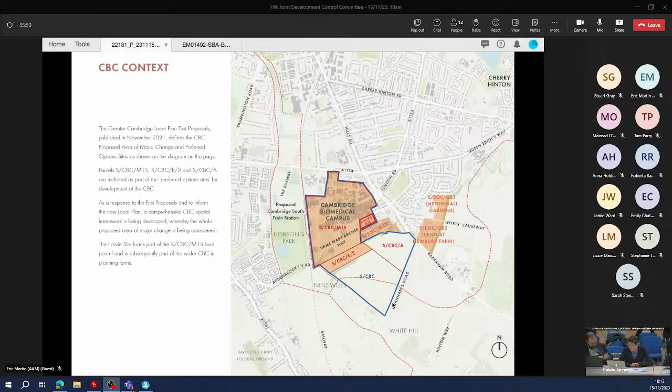So I think the screen is working, so I'm going to go through a few things. First of all, providing a bit of context to where the Forvie site is. The Forvie is located within the Cambridge Biomedical Campus, as some of you may know, and the CBC has recently been proposed as an area of major change as part of the local plan first proposals. What you're seeing here in the map is, in orange, the sites that have been allocated already, and in the blue line are the sites being considered for allocation, particularly expansion of the biomedical campus to the south.

Not part of this briefing, but important to mention that we also, as master planners, are working on the emerging CBC framework, being informed with officers, and backed by evidence-based scenarios that hopefully is going to go to members at some point in the new year.

What we've been looking at is how the structure of the place is going to work: street hierarchy, open spaces, biodiversity net gain, blue and green infrastructure, and essentially how this becomes a new neighborhood of the city, including green belt enhancements. The important part of this master plan or framework we've been looking at is creating a series of open public spaces located within a 5-minute walk from each other, and this is the structure of the place.

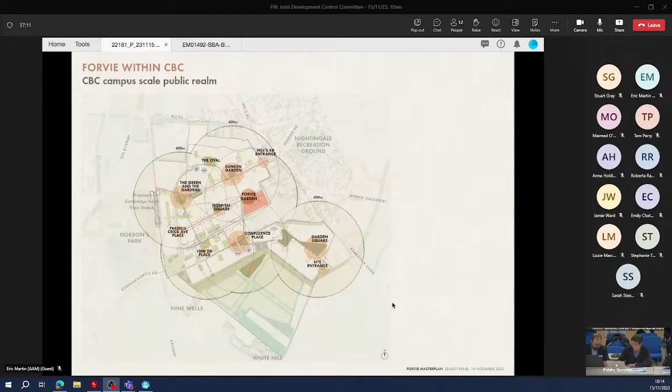These are areas where amenities are going to be located, where blue and green infrastructure is consolidated with amenity spaces and transport hubs, etc. One of these places is within the Forvie sites, and we've been calling it the Forvie Garden. We're going to discuss in more detail as we go through the presentation what this means.

This is the site itself, the Forvie sites. It's a site that sits in a transition between different scales and different characters of the place, from residential to the south and the east, to more large buildings that are part of the hospital, Addenbrooke's Hospital, to the north and northwest. We can see on the left-hand side the Children's Hospital site, which has been consented and is going to start on site imminently. There are 4 existing buildings on the site.

The existing Mickle building is on the lower left-hand side, there where my cursor is, and there are 3 other buildings on the site at the moment with different degrees of occupation from university users. They range from the 60s or late 70s to the early 2000s, in different degrees of need of replacement. It is a very car-focused area, with access to the site from the north. There are about 180 spaces in the site at the moment, and the idea is to transform this gradually into a place that is more people-focused.

As you can see, one of the main characteristics of the site is the existence of mature trees, mainly around the border, and that's something we're taking into consideration. From the university's point of view, the idea is to create a new world-class research center focused on neurosciences and mental health.

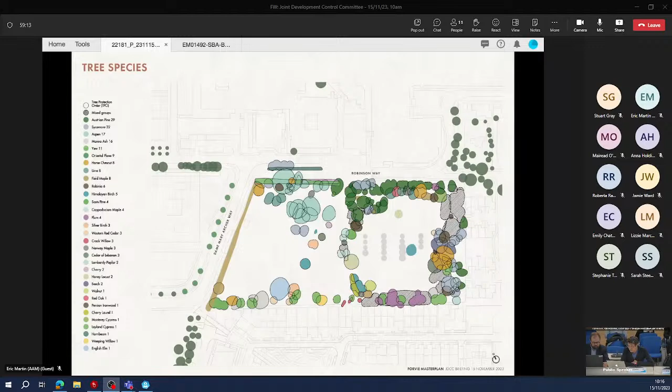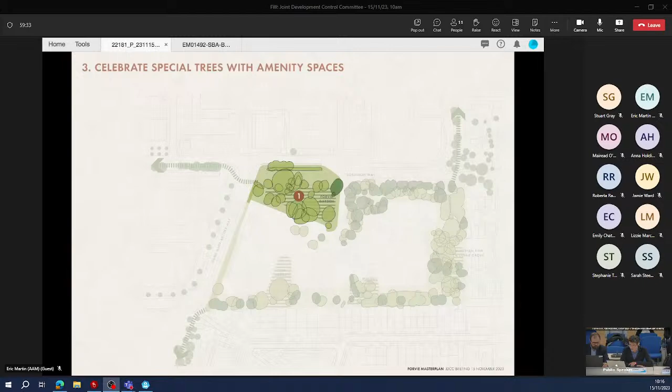As I mentioned before, trees are very important on the site, so we've been surveying, understanding, and cataloging these trees to understand their value, not only individually, but as a group. This has informed the proposal from the start, so we've created a landscape-led approach to the master plan, where we celebrate special characteristics of these groups of trees or individual trees in order to create a concept and approach to the landscape.

One of the key areas is what we call the Forvie garden, which sits at the northwest of the site, and this is where the new station opens, where people are going to come from. So it's a very important place on the site, and this is how it could be. This is an illustrative image showing the transformation of that site. At the moment, it is a car park.

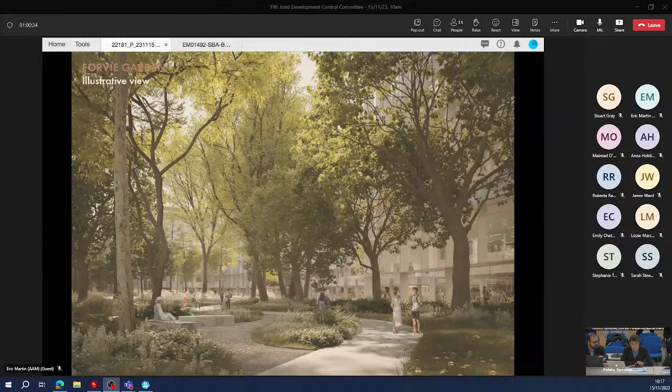So the idea is to introduce pedestrian access, cycle access, and work with new planting, and retain most of the existing trees on site with the buildings in the background. The buildings are going to be replacing the old buildings, and this is going to happen gradually over a period of time, with the Mickle 2 building happening as a first phase, nestled among trees and with paths leading to the different blocks.

The idea is that this is a scenario where the master plan is complete, so it's 3 blocks. Mickle 2 is in the middle, so it's the B1 block that you see right in the middle, and there's another 2 blocks, one in the west and one in the east. This is the roof plan and this is the ground floor plan.

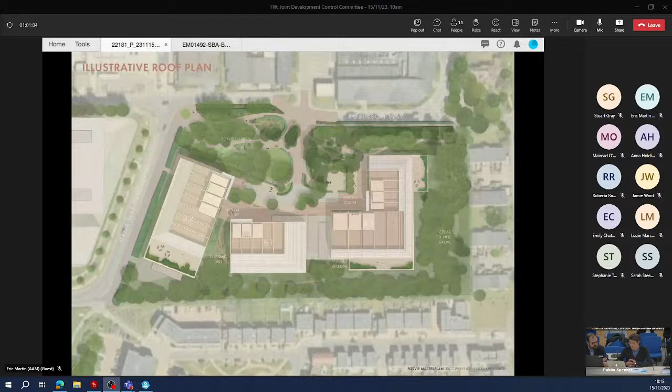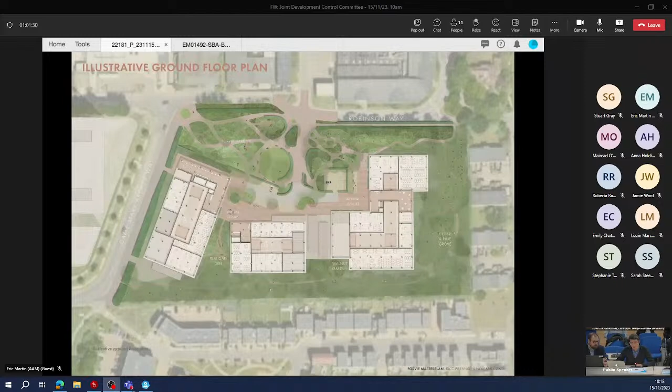These are indicative layouts. We've done a lot of work in order to establish constraints, like root protection areas, etc., where the blocks and the areas of development could be. There's a lot of information on the back of this, but you can see that the idea is that the north is very permeable with new pathways for people and cycling, and the south and southeast remains much more green, forming a green edge.

We're starting to establish an architectural language for what the blocks could be as a design code along 5 principles, from animation of the ground floor to legible entrances, facade hierarchy that responds to different orientation and location of blocks, etc. Shared amenity spaces both on ground floor and in different places in the building, and very importantly, a roof form that is sculpted and shaped.

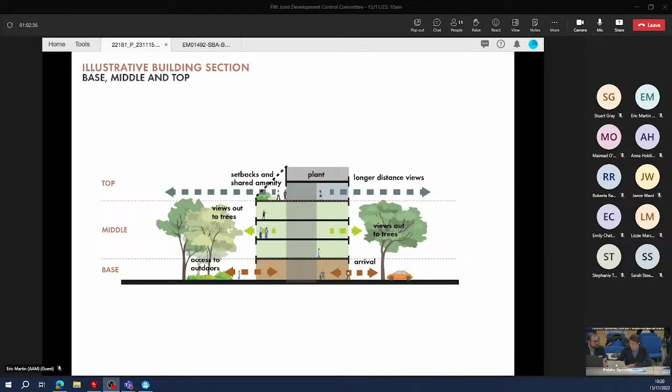The idea is that what is above the tree canopy then has setbacks and gets sculpted in a way that it's interesting, to form this idea almost that there's a science village here. So anything that skylines above the tree line then becomes an interesting skyline to avoid flat roofs and blocks, which are prevalent at the moment in CBC, and we're trying to change that.

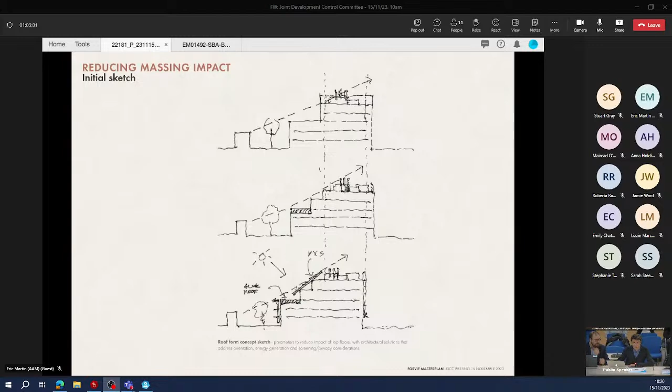This is an early concept sketch that describes how that could be achieved by stepping the top and working with plant on the top. There's a lot of kit on these buildings because they're science-based, so it's the idea of celebrating science as well, working with the roof rather than against it.

These are photos of a model that we did, a physical model that shows how the phasing could work, starting at the top right-hand side with the Mickle 2 building, and then gradually and carefully replacing buildings along a period of time as and when needed.

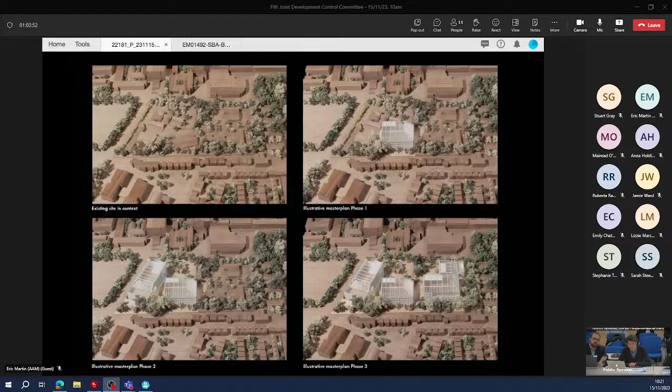And this is just photos showing a model. I'm going to hand over to Neil, who's going to be talking about the technical aspects of the master plan.

Thank you. Thank you, Eric.

So I'm going to talk quickly about the engineering and technical aspects. So, Ramboll, I'm presenting here. We're covering the discipline shown on screen.

Could you just bring your microphone a little bit closer? Is that better? Please take your time.

Yeah, okay, don't rush. So I'm aware I've got a lot to get through here in quite a short period of time. I'm covering lots of disciplines here and lots of detail over the last 12 months that we're going to talk through.

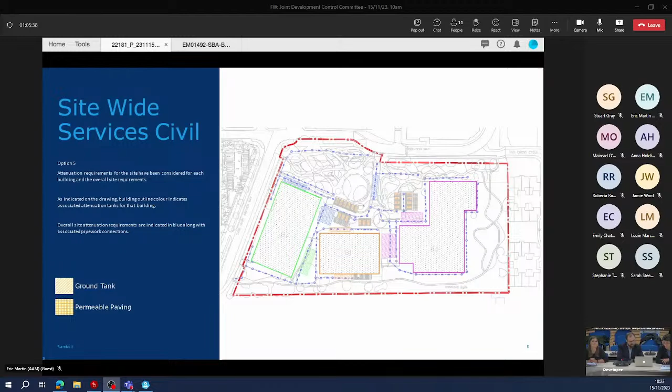We are looking across disciplines. The site is relatively constrained because we're trying to do the right thing around the trees and the greenery, protecting the tree protection zones and root zones. So we have to think quite early on about how all of these services stack up and how they integrate and coordinate with each other.

So you can see here the various colours of shading. As I say, I'll talk about the civil scheme in a minute, but this is just to give you an idea of the level of thinking we're at. A lot of thought and time has gone into the coordination, reinforcement, and phasing of the utilities to serve these buildings as they come online.

Sorry, I'm not interrupting you. Sorry, I am interrupting you, but I just want to say there's going to be a fire alarm in a few minutes' time. It is a test, not an actual one. So we'll pause when that happens and then carry on. Just to warn you.

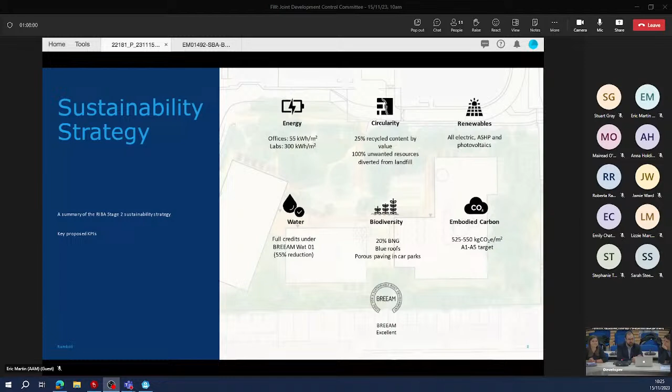So to talk about BREEAM, currently targeted score is 77.45%, so a BREEAM rating of excellent, with a potential to achieve 88, and we'll obviously target all of the water credits in there.

This is an early BREEAM assessment, done at master plan level, not a building by building level. As the design of the scheme progresses, the BREEAM assessors will become more targeted on a building by building basis. But for now, it's about setting the design parameters and understanding what the outputs are and the targets we're trying to hit.

So, I promised you a civil engineering section.

The site runoff and surface water treatment of the site is probably one of the most technically challenging aspects that we're dealing with. We've got very, very low runoff of 2 litres per second per hectare, and in order to achieve that, we have to put lots of attenuation on the site. So we have a combination of blue roofs on the buildings, essentially a zone on a roof that can hold onto water and release it more slowly into the drainage system, rather than the traditional way where it just all pours down the drain and off it goes. So the strategy is all about capturing the water and slowing it up as much as possible so that we don't overwhelm the local network.

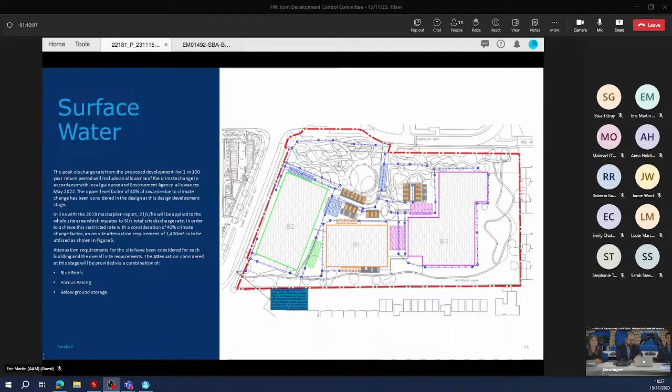So to talk quickly about mechanical services, there's quite a lot of detail in here, which is really for your information as a pack. So I won't necessarily read every single thing that's on every slide, but you can always refer back to it. So this is a master plan.

We're not actually designing the buildings themselves yet in all of the detail inside, but what we do need to do is be able to size the primary plant and understand how the plant will fit within the planning envelope, essentially within the building envelope that Eric's team have drawn, and coordinating with them with these nice chamfered roofs that lessen the visual impact of the buildings and make it look attractive.

So in order to do that, we do some preliminary calculations based on a number of assumptions for now. These are going to be, as Eric describes, laboratory buildings, and laboratory buildings have quite a high plant requirement, so the plant on laboratory buildings is an important aspect of the design, and they need to be considered early on.

So the site will be an all-electric, fossil-fuel-free site. We'll be removing natural gas for heating and replacing it with electrically powered air source heat pumps.

Good to know it works. And just to remind you, in total you have about 20 minutes, so I'm going to speed up a little bit.

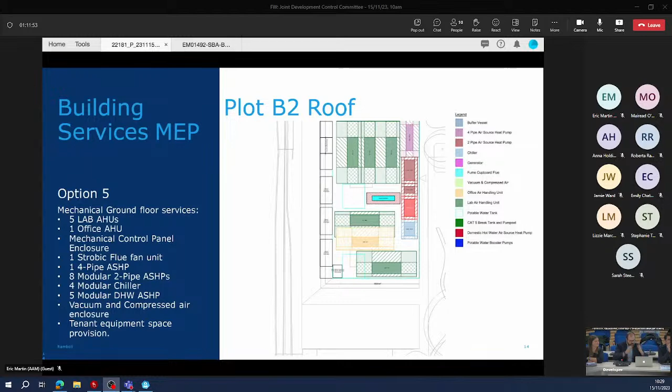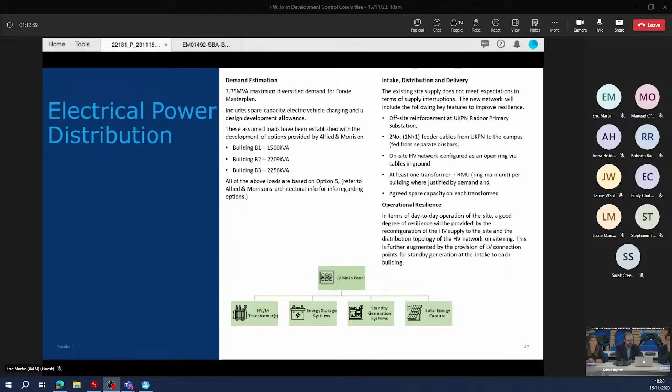So electrical - I talked about all electric buildings, so we obviously require quite a lot more power in order to power this all-electric fossil-fuel-free site, so we will be applying for additional power, approximately 7 MVA, and there will be electric vehicle charging on site with 112 spaces with a mixture of active and passive.

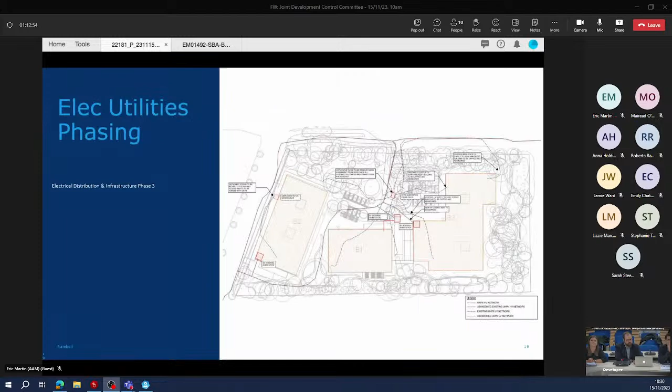And what I've got on screen here now really is just showing you the phased development of the electrical infrastructure.

Exterior lighting - we've done a very early exterior lighting design, but rest assured it'll be designed in accordance with all the current regulations and guidance to not bleed light out of our site unnecessarily, maintaining that darkness so that we don't annoy any neighbours, but enough lighting at the centre of the site to make sure that people are safe and that we've got the correct levels of lighting for everybody wandering around.

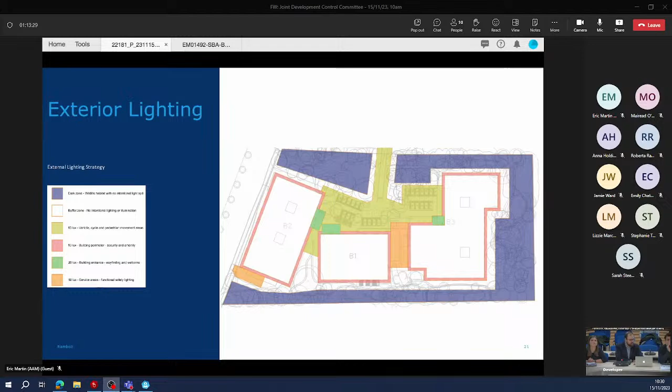Fire suppression: our initial studies have shown that we will need to extend the fire hydrant system into the site to make sure we're close enough with the hydrant to meet minimum distances. We're currently proposing dry riser systems per building, but not sprinklered at this stage.

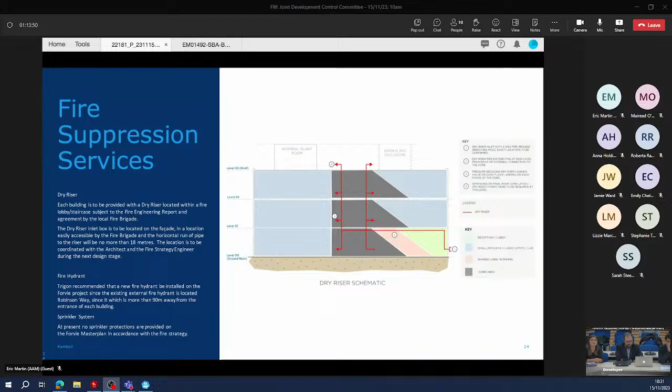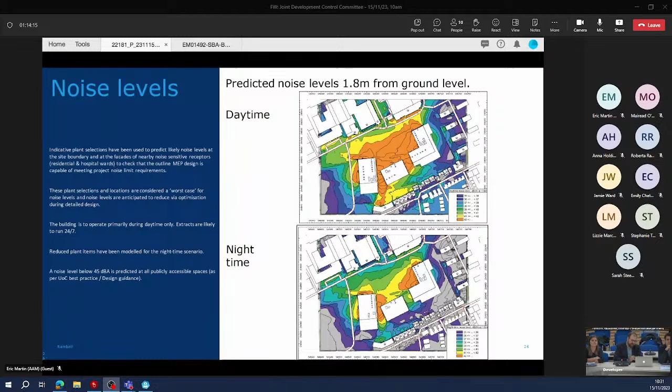Acoustics is an important part of this site. We're constrained by neighbours, with residential neighbours on our boundary, so we've done detailed modelling shown on screen - it's in your pack if you want more detail. We've modelled all the noise levels and their effect on neighbours. Green on the boundary shows we meet the City Council planning noise limits, in both day and night with the plant running.

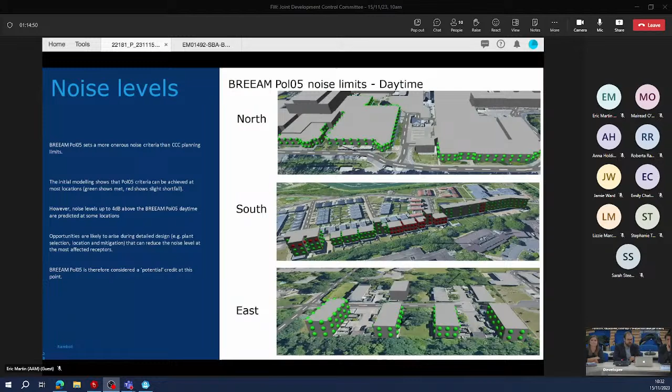We've also assessed it for BREEAM - red receptors mean we're missing the target slightly, green means we're meeting it. So we have a little work to do on BREEAM Pollution 05, which is a tougher criteria than the council limit. But because we're at such an early design stage, there's lots of design development to come, and we think we can optimise it to achieve the noise levels.

We looked at the shape and orientation of the buildings, taking typical spaces and using these to inform Eric's team on the percentage of glazed ratio they can have and the specification of the glass. We're always treading that balance between natural daylight, reducing lighting energy in the day, versus excessive solar gain in summer and having to cool the space down - calculating that balance point.

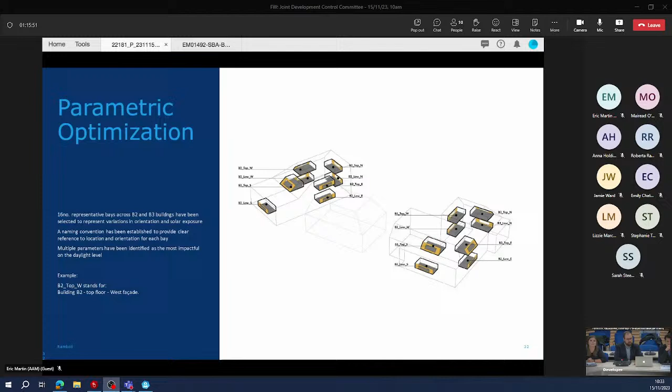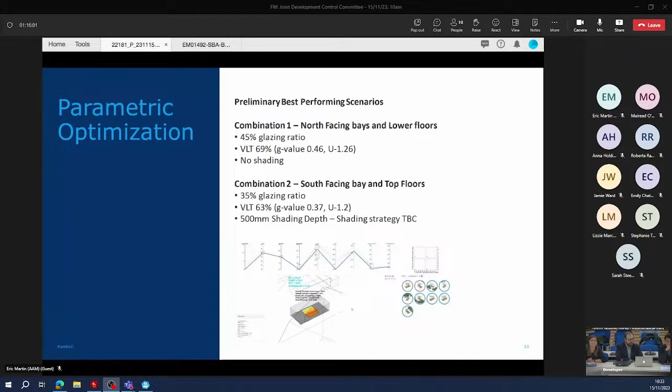Nice graphics on screen showing how we've achieved our design specification - you can see the glazing ratios for different orientations of bays.

Can I just ask how many other speakers are planning to speak? Just one. Okay, thank you. Just be mindful of the time. Yeah, shall I wrap up?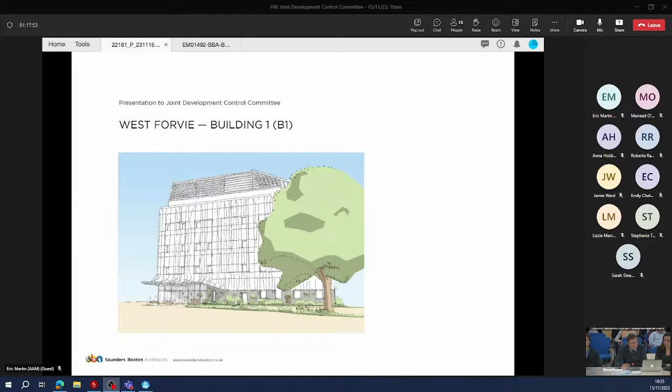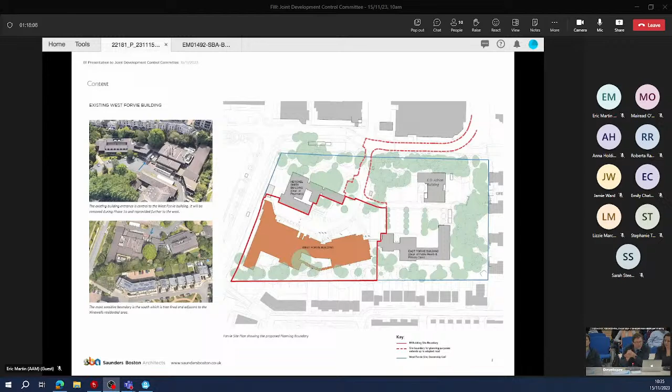These drawings show their location within the building. They are a relatively small department, but they are a really critical department at the university.

They do some very unique work, as I said earlier. They are growing and their type of work is changing, which is part of the need for this project. The other part of the need is the fact that their existing building is in a relatively poor condition. It doesn't perform very well environmentally, and it is very much at the end of its life. So there's a very pressing need to provide them with some new accommodation as part of this wider building.

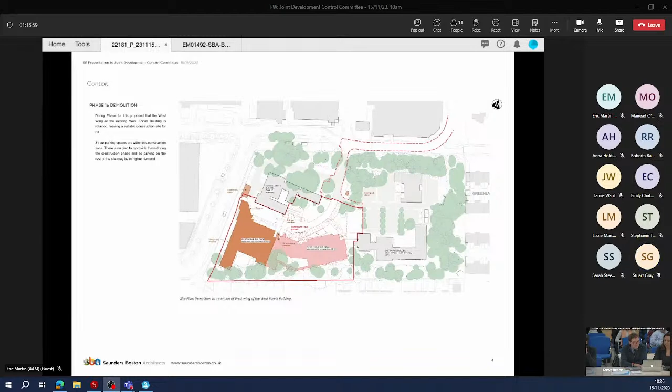We'll skip through some of this context since we looked at it a bit before with Eric. There's a lot of work we've had to do around the trees. There are some really key trees that we've worked with the officers on retaining, and that's how Eric developed some of his strategy around the landscaping and gardens we talked about earlier. A lot of what we've done is based around how we keep those key trees and actually enhance them, working around them to create better spaces than currently exist, because there are real opportunities on this site which are currently missed by a lot of the car-dominated stuff Eric talked about earlier.

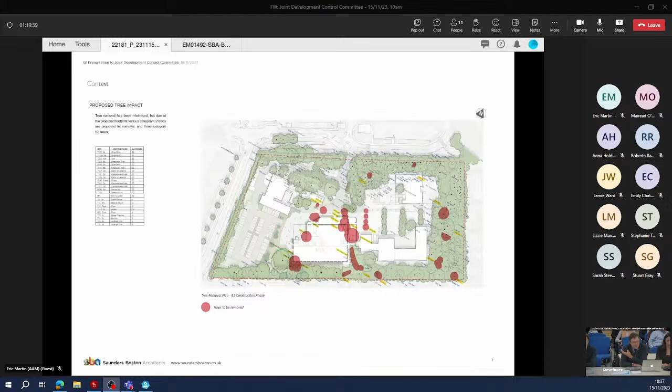So how can we use those to enhance our design and make it feel like an actual place, rather than a slightly weird 1980s bungalow land, which it kind of is at the moment.

My colleague Oni is going to talk a bit more about some of the details.

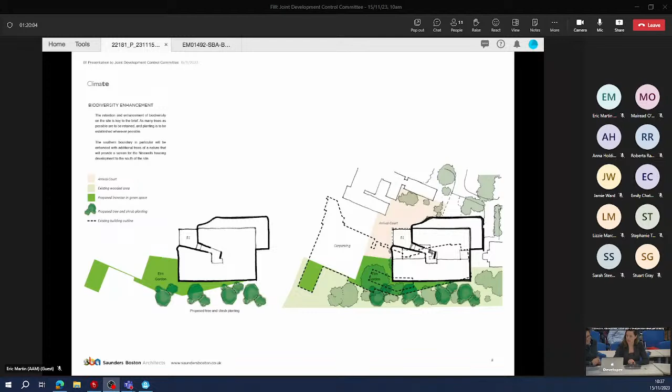We're looking to enhance the green space as much as possible. You saw some of the trees that were restricted - the elm in particular, a really large tree, is within a few metres all the way around it of the current building. So we're releasing it and opening up as much green space along the south as possible to connect into the rest of the south that's already there. That's the landscape design as it is.

The existing building will be half retained while construction takes place on the B1 building, and then the rest of the building is demolished to make way for replacement car parking for what's already on the site, plus a few more spaces - about 20 - to cater for the new occupancy numbers.

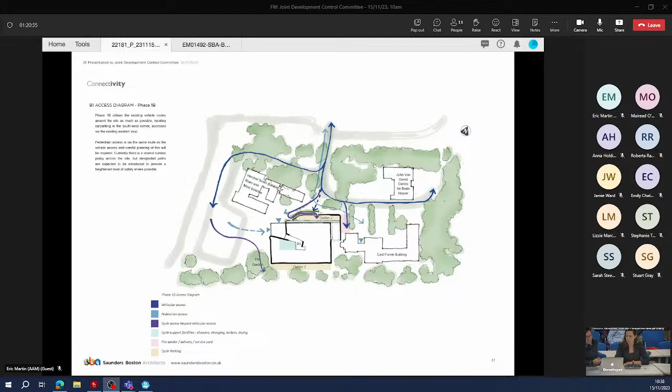This is a diagram of the access. So you've got keeping the vehicular access to the north, and then showing how you access the new building. This is how, when the master plan is in place, if designed as currently proposed, all of the pedestrian routes would be from the north, and cycling as well, minimising vehicle access to the site. There are options for cycle parking either to the south in the wooded area or to the north on top of the service - there's a service wrap that goes around the building, which will be explained later. So that's the preference, but we're just seeing if that's really feasible.

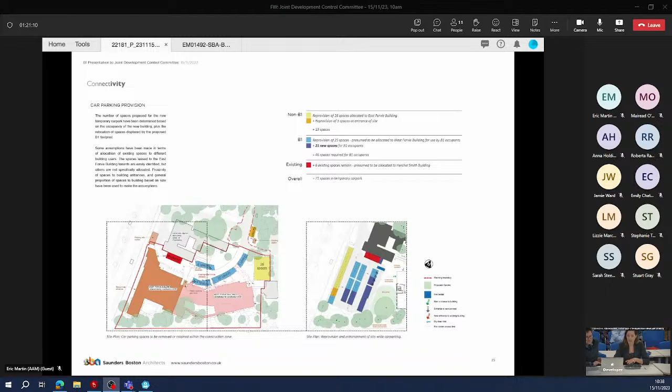Car parking is here - this diagram shows how most of the spaces are replacement spaces, and there are only 20 new spaces coming onto the site.

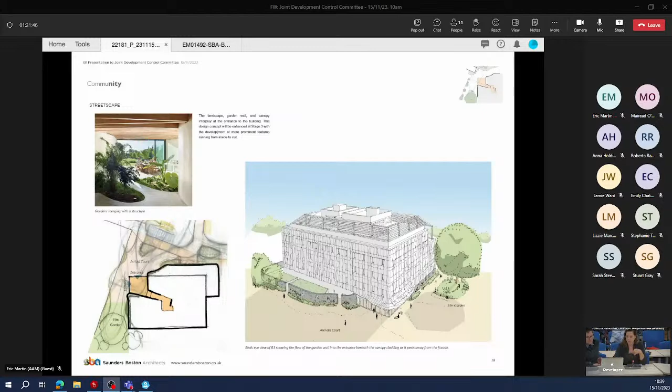The arrivals court is key for the design, both for the first building, B1 itself, and also for the master plan. So the arrivals court is highlighted for the development of the building and how it's designed. This shows how the focus of the building is onto that corner - sorry, the northeast corner, northwest corner - bringing out the canopy to open up onto the entrance, and looking for the flow of people and the visual flow to be right across that space, filling it with places for people to stop and collaborate or have their lunch, that type of thing.

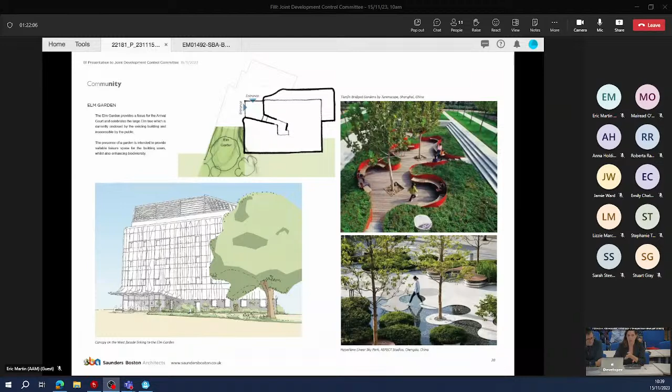Seating and planting - the elm garden, the elm tree, is going to be focused on, and at the moment it's not publicly accessible. The design would mean you could go and sit there, and the design of the garden around that is key to increasing biodiversity. At the moment that's completely built across, all of this land is built on. It's continuing the woodland on the south that already runs along most of the south, but not behind the current building, so they would increase that and again make it accessible for people.

The entrance space of B1 has been designed to be a collaboration space. It would be publicly available at the moment, so we're looking at designing it in a way that people would work there, eat there, talk, and cross-pollinate ideas.

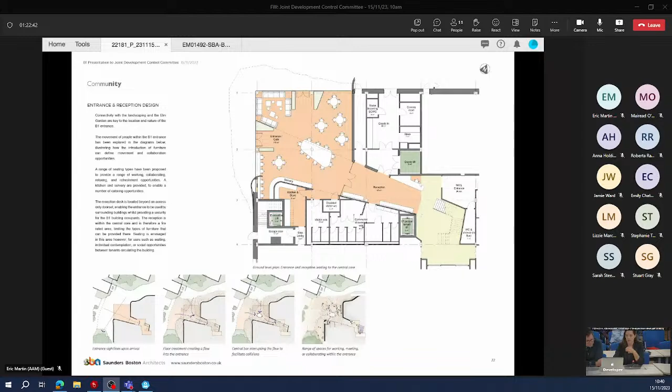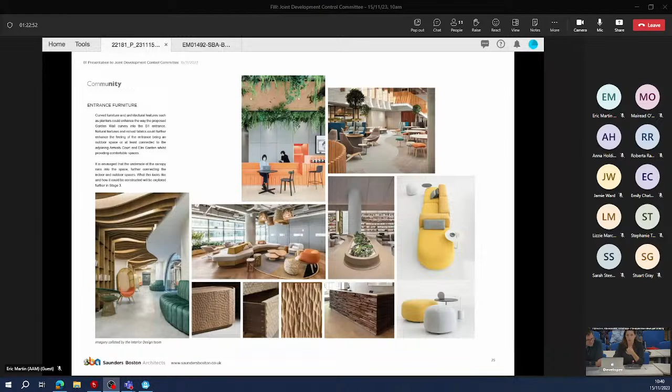That's a visualisation of the space and the type of furniture we would want to bring in, using natural materials as much as possible, with textures to make it feel very warm.

Moving into the building, there's a central staircase which is the key vertical circulation, with a light well at the top to bring light into that space. It's a space for people to stop, and the building is designed for up to 12 different companies or research groups.

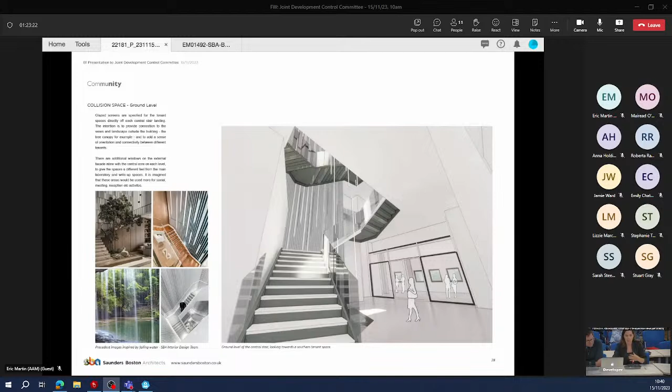The idea of these spaces is to allow people to meet and coordinate ideas, a collision space we're calling it. There's also a spine running north to south, opening up the building visually with as much glazing as possible.

These spaces could be tenanted, perhaps as shared tenant spaces with meeting rooms, seminar rooms, and tenancy entrances. Otherwise the building is left as flexible as possible, so tenancies can be larger or smaller - someone could rent a quarter, half, or full floor depending on their needs. We're looking at roughly 60% laboratory, 40% office space, with full flexibility on that.

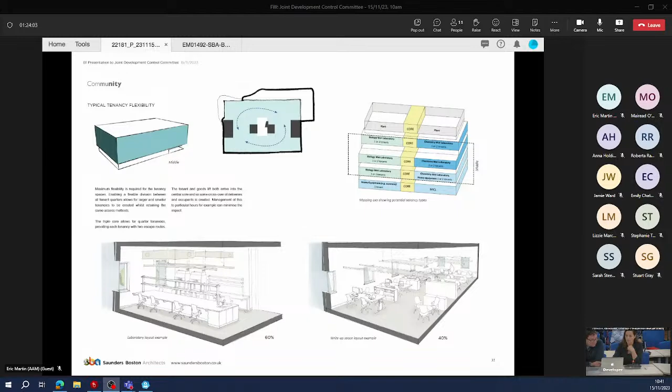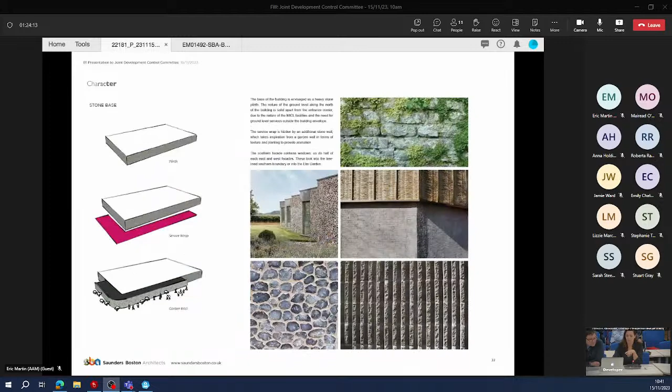The character of the building we've explored here includes a stone base, a plinth on the ground floor. This is where MRCL and similar facilities have theirs, since they need high levels of shielding and protection - very thick walls and not many windows. At the entrance, we're looking to bring that solid stonework through, giving that same feeling to the ground.

Above that, the middle section relates to the tree line, taking cues from the tree canopy base and top, so we're looking to have a completely different architectural language at that level.

We're also setting the building back, as discussed before, from the housing to the south, to make sure there's no overlooking into their gardens and no acoustic interference for them.

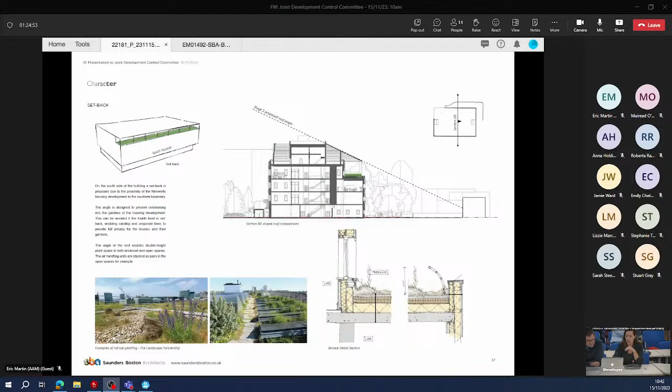The cladding on that wrap is looking to be angular and playful. The idea is also to give as much shading to the windows on the south as possible, using the angles to increase daylighting while controlling solar gain, coming in and out as appropriate.

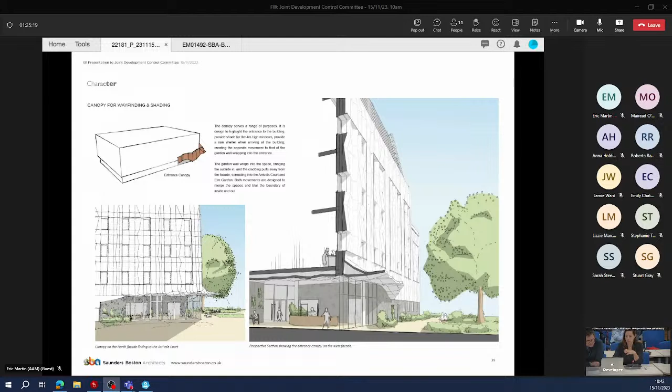The canopy is looking to extend the facade out to create a sunshade for the large amount of glazing on that corner, and also a rain canopy for when entering the building. This is a concept design, looking more at how it could work technically.

Up on the top, there's a large amount of plant to service what's a very heavy laboratory building - there are actually two levels of plant up there. The acoustic baffling is angled to minimise the visual impact of that space.

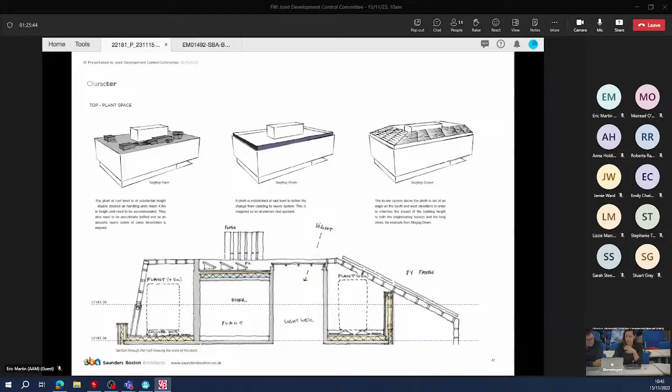Here's an impression of another building designed by Eliza Morrison, with views from the Magog Down. This is a representation of the whole building together.

For construction, we're looking to enhance thermal performance as much as possible, making it as efficient as possible. This is how the shading would work, and there will be further studies to maximise daylighting while minimising overheating.

Then there are all the different sustainability strategies being included, with a lot of water management as already mentioned - blue roofs, green roofs. PV panels along the south benefit from extremely good exposure, so we're looking to maximise the amount of energy generated on site.

That's everything - that's the final slide.

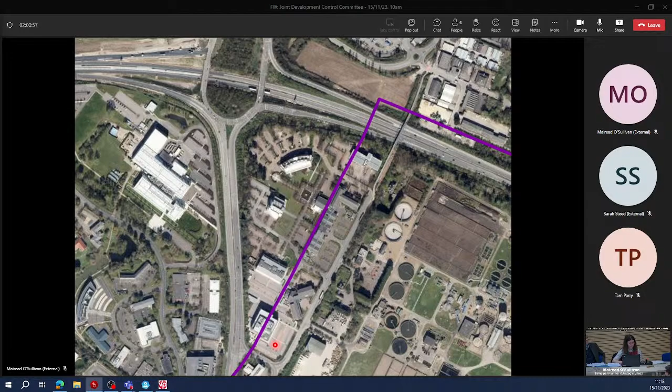So the site lies within current strategic policies within the existing local plans. We've got the South Cambridgeshire local plan covers the area around the train station, and the rest of the allocation is within the City Council area and is covered by Policy 15, the Cambridge Northern Fringe East and New Railway Station area of major change. And this is the sort of precursor to the area action plan.

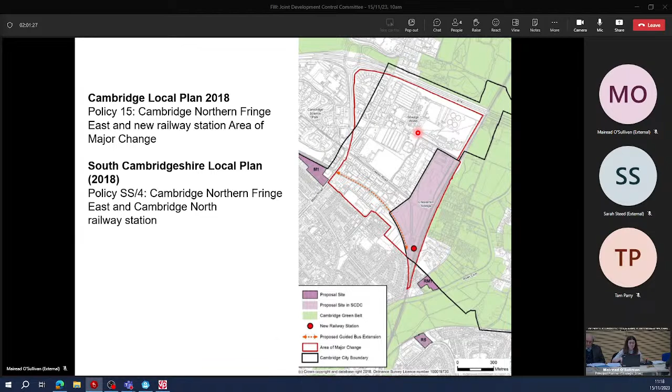And then just to touch upon it, the site lies within the area that is covered by the proposed North East Cambridge Area Action Plan. As I outline in my report, the AAP currently has limited or little weight, but the development is not considered to prejudice the wider development of the AAP, although, as I will come to, there is a discrepancy in terms of the heights proposed going beyond what is set out in the Area Action Plan.

So I believe you had a look at this slide in the last committee as well, but I thought it helpful just to touch on the different applications at different stages that are coming forward in the area. So all of the orange plots are pre-app at the moment, the core site being the kind of biggest one and closest to the site.

The red sections are current live planning applications. We've got the Brookgate site, which has been appealed, the Merlin Place site, which was at JDCC last month, and the Vitrum building site here. And then, as I've mentioned, the blue site here being the St John's site with the Dirac building, which has planning permission.

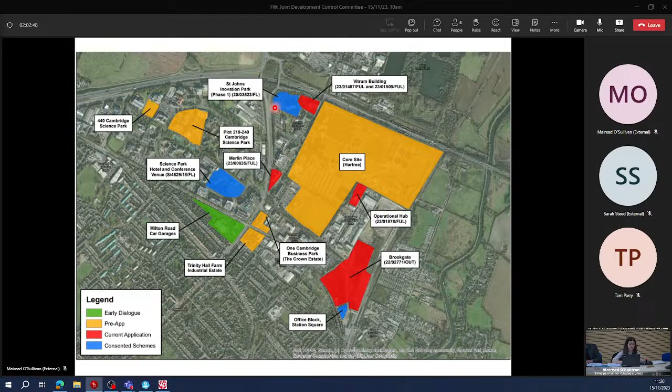The application was subject to a pre-application developer briefing to JDCC in January of this year, as well as Cambridgeshire Quality Panel and Disability Consultative Panel. I'm not going to go through every element that responded to that in this slide, as that would be very textual, but it's covered within section 10 of my report, and I'll try to weave it through my presentation where members expressed an interest and changes that have happened as a result.

Since the application has been submitted, there have been amendments to the scheme. There were originally objections from the urban design and landscape officers, and additional setbacks have been included on level 4 to try and overcome this objection, which have removed those objections. There's also a small extension in this lesser sensitive part of the building to make up for some of the floor space lost. As I've mentioned before, cycle parking has been relocated from the basement to the ground floor.

So I have a site plan here to illustrate the form of the building. It's two interlocking block forms. In terms of landscape features, we have a public square adjacent to Cowley Road and the Jane Coston Bridge. There's also a colonnade at ground floor, a covered area, part of the layering of the building design, which we'll see when we come to that element.

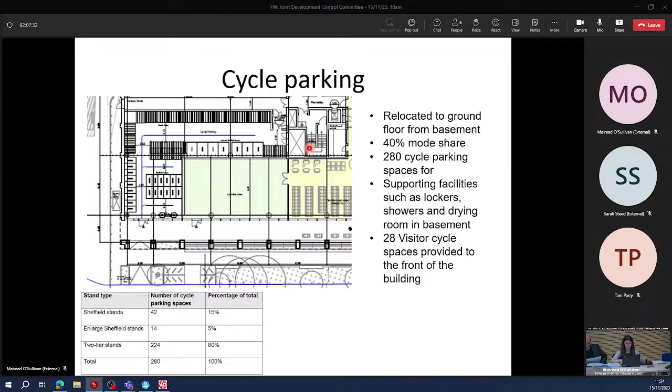Moving to car parking, provided in the basement, there are 99 spaces proposed. This has been reduced since the application was submitted, from 102. There are 5% blue badge spaces provided. The overall level of car parking is compliant with the NEC transport evidence base, which requires a maximum of 29% mode share, and what's being provided here is 24% mode share. It's also a reduction from the existing 108 car parking spaces on the site as it is. In terms of potential displacement parking, there is a Section 106 contribution requested for parking restrictions in Milton, should they be required, as the site is within walking distance of Milton.

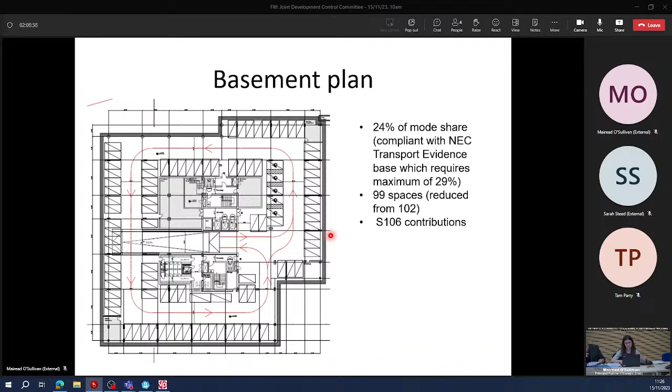Just briefly touching on the floor plans, level 4 shows the terrace areas, which would include planters. Should the Cambridge Water Recycling Centre be relocated, these could also become amenity spaces with level access, but use of these for amenity purposes won't be possible while the Water Recycling Centre is in situ. Then just to touch on the plant level, which has a green roof with plant set back from the edge of the roof. The plant would be covered by a mesh screen that would be planted with greenery.

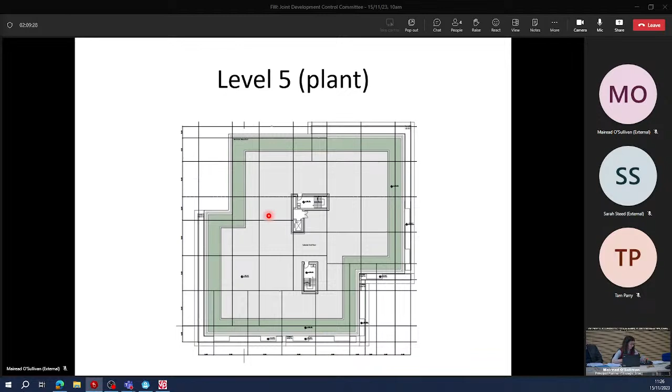I'll touch on the elevations, but move on to more CGIs and visuals from the landscape and visual impact assessment, as they're probably easier to understand. But first, just to identify some of the key features of the building.

The top elevation is the northwest, where we have the basement, car park access and servicing area. You can see the terracing and the plant level, which will be quite green, as it will have climbing plants.

The bottom elevation is to the A14. The dotted line you can see here is the line of the trees. When I come to the CGIs, we'll see the amendments to the scheme which introduce this additional element of terracing. Then we've got the southwest elevation to Cowley Road on top here.

You can see the colonnade of the building with glazing underneath, and the way the fenestration changes as it moves up the building, with larger elements of glazing lower down.

You can see the different areas of terracing we've planted, and the public square here. Similarly, the elevation towards the Jane Coston Bridge shows the public square, which has a feature tree, and the main entrance to the building here.

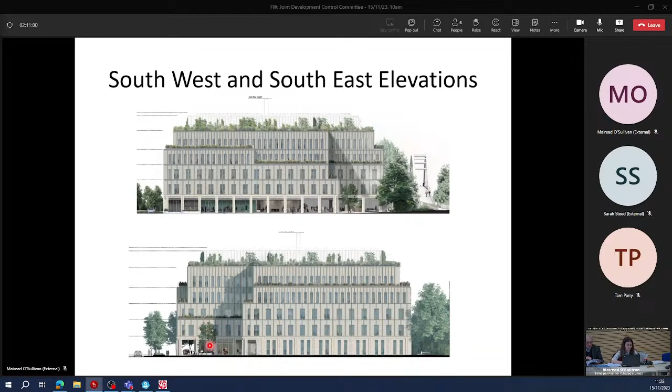In terms of the sections, we've got basement car parking and a larger floor-to-ceiling height on the ground floor. Generally, the floor-to-ceiling heights allow for flexibility should another use come forward, which I know members were interested in during the briefing. The lab and office space is divided within the building.

Lab space would be provided in the less active areas, towards the A14 and the servicing elevation, with office spaces closer to the colonnade and the public square.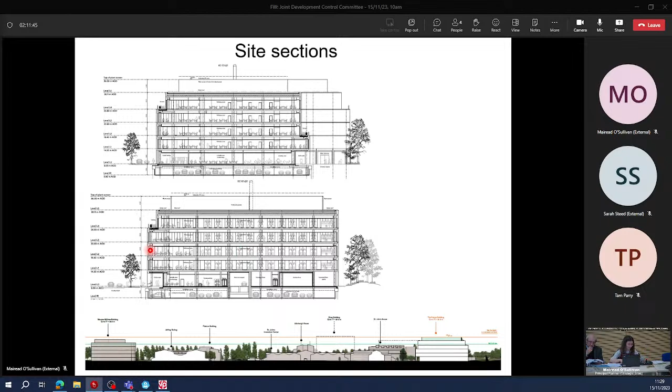If I move to the next slide, you'll see the additional area of terracing and the setback, which provides some relief, pulling the mass of the building back and adding to that layering.

Maybe if I just go back and forth once more for clarity: here we have it as submitted, and here as proposed.

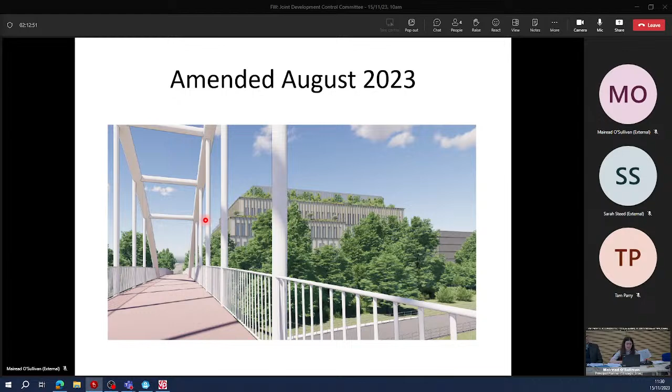Again, the Cowley Road elevation as submitted - there were concerns about the length of the facade and it appearing quite blocky. As on the last slide, there's a setback in this area, but also a further setback on the other end of the building. So those are the two areas to look at.

This is the scheme as amended, with additional setbacks here and here. This is generally considered to reduce the overall length and blockiness of the building.

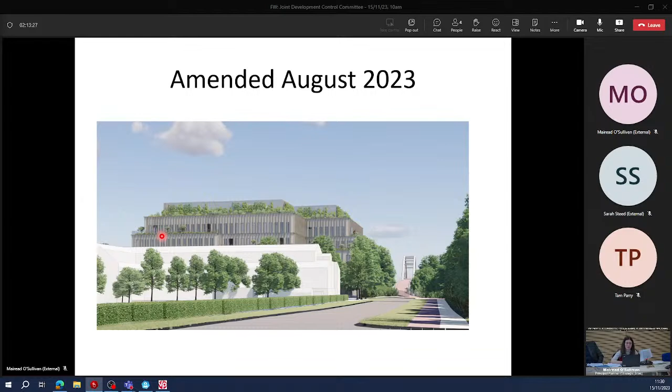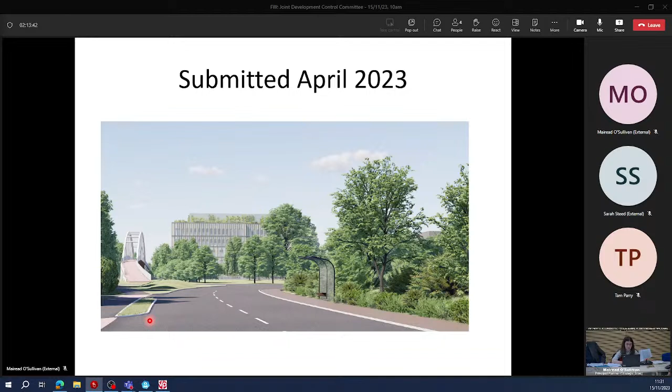Finally, moving on to the views from Milton - this is on the other side of the Jane Coston Bridge towards Tesco, looking across. This is as submitted, and as you'll recall, it's in this area that the amendments are made, shown here as submitted versus as amended.

Here we have a site section showing the height of the proposed building compared to the St John's area. As mentioned, the Maurice Wilkes building has been built out. The key site and building informing the massing is the Dirac building on the adjacent site, which has planning permission, and you can see the heights of the buildings are very comparable.

To note, the green line on this plan, which hopefully you can make out, represents the NEC AAP height level.

This is just a helpful slide to show the point around the length of the facade and how it compares to other buildings. It's quite comparable to the Dirac building, here, and the Maurice Wilkes building.

Also, just to pause and reflect on the fact that the St. John's Innovation Park is subject to a master plan. The master plan has been prepared by St. John's and doesn't hold any actual weight in our decision making, but it does tell us the intention for that site to be redeveloped, regardless of the status of the AAP.

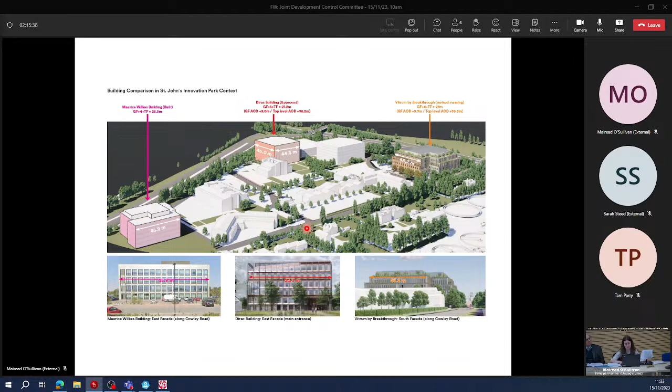Moving on to trees. The proposed building sits further back in the site and requires some tree removal in the tree buffer that runs between the site and the A14 and beyond. There are 31 trees being removed and 70 trees being planted. I should point out that all of the larger trees within the site have been retained and were seen as a constraint to development, and the trees being removed in this buffer are generally the lower quality trees.

The tree officer has raised concerns but not a formal objection to this impact in terms of the relationship with the tree buffer. The additional planting proposed in the tree buffer area is quite large semi-mature trees, which will help with the screening of the building and are shown on the visuals. The tree officer has noted some concerns about the inclusion of these larger semi-mature trees and their impact on some of the existing trees.

But a condition is recommended requiring replacement planting should any of the existing trees shown to be retained fail within 5 years. Any new trees would also be required to be replaced should they fail, via the landscape condition that's protected in that sense. Overall, the tree impact has been considered to be acceptable.

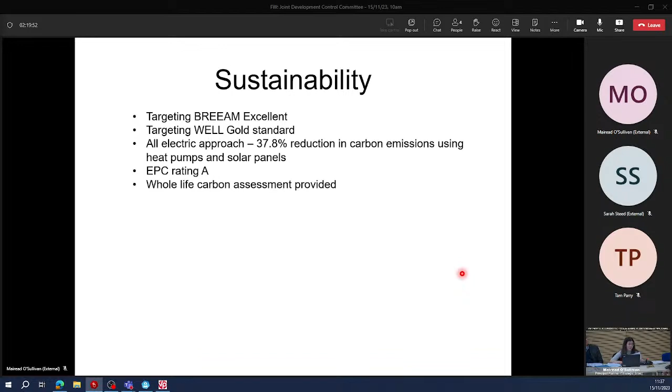Moving on to sustainability, the building is targeting BREEAM Excellent and is comfortably meeting that at the pre-assessment stage, as well as targeting the WELL Gold standard. It's taking an all-electric approach with a 37.8% reduction in carbon emissions using heat pumps and solar panels. It has an EPC rating A, and a whole life carbon assessment has been submitted with the application.

On the water conservation area, there's a water conservation strategy which we've recommended a compliance condition around, as I mentioned at the start of the presentation. The BREEAM calculations show a 74.87% improvement over the baseline condition with all 5 WAT 01 credits. In terms of water use, it's estimated that it will be very much comparable with the existing building, with estimated fresh water consumption for the use at about 9,400 litres per day.

The existing building, which is under-occupied, uses about 9,000 litres of water per day, but should it be fully occupied, it's predicted it would use 13,600 to 17,100 litres per day. In terms of how the water conservation strategy is achieved, it's a hierarchical approach to minimising water consumption, starting with point of use efficiencies, low water fittings, then system efficiencies, and then also alternative sources of water for grey water recycling, rainwater harvesting, as well as collecting water from the air conditioning units.

To touch on the adjacent site, I thought it would be helpful to include some slides showing the St. John's development, which is consented. It's these 3 buildings here.

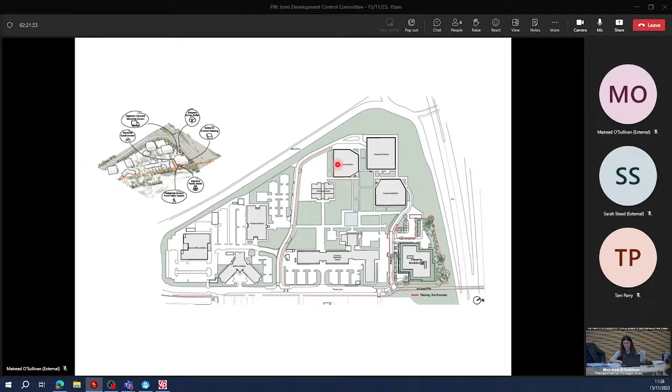Just briefly to touch on this for information, this is sort of how the adjacent site would appear when it comes forward.

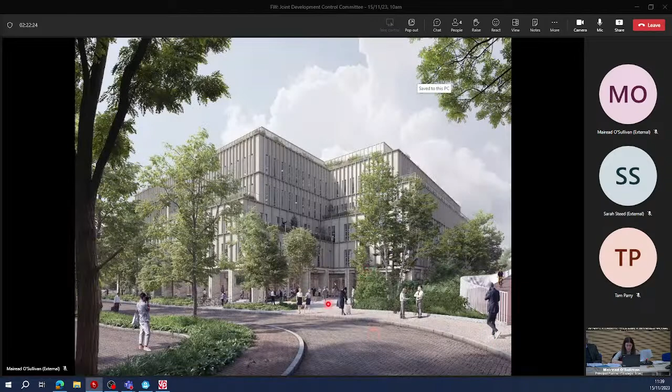Here we have a CGI of the proposed building, just to highlight some of the key design elements. We've got the public square here. This is the Jane Coston Bridge, looking from Cowley Road. Public square here with the colonnade which wraps around the building, and you've got the different areas of terracing as well.

Cyclists would come off the footpath over here and access the cycle store down here, further down the colonnade on this plan. This is just further along Cowley Road, and you can see some of the cycle parking in the public realm for visitors.

I should highlight that there is some seating shown on these plans, and as I flagged earlier, it's not possible for there to be areas of seating while the water recycling centre is in situ. But these areas and the detail could be provided at a later date through that building management plan condition.

This is the same view we saw just a moment ago, but this is from the landscape and visual impact assessment, a verified, rendered view of the proposal. In terms of architectural treatment, I don't think I've highlighted the materials: the base of the building will be brick with aluminium cladding on the upper floors.

This is the view from Cowley Road. As you'll recall, we had amendments in this area with this additional area of terracing to reduce the length, and again as well in this area here.

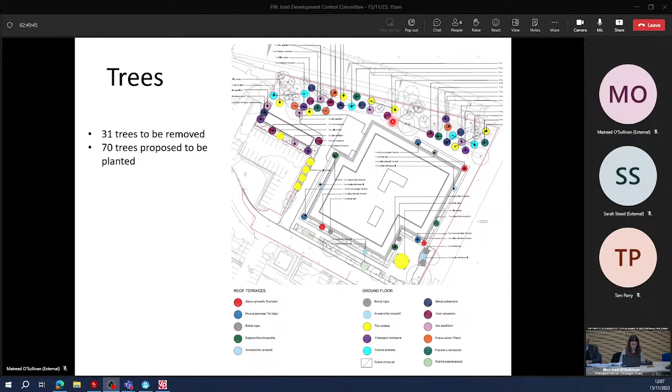And we've already said that those replacement trees should also be covered by a further 5 years. Great. Councillor Porra also mentioned cycle stands, disappointed that only 20% were Sheffield.

So for these high volume cycle parking, non-residential buildings, Appendix L does allow for a high level of double tier spaces to make best use of space. They are providing 20% Sheffield stands, and we have recommended a condition requiring details of the cycle parking so we can have assurances around the gas-assist lift for the 2-tier.

And the other point I would say, it's a very different thing getting a bicycle into an upper tier if you haven't got enough space to step back and get it up there. So we need to know there's sufficient spacing between the stands to enable people to get their bicycle onto the second tier.

The application implies the applicant will be aiming for BREEAM outstanding, not just excellent, doesn't it? So I think that covers that part.

You were saying, Councillor Porrow, that the footprint is not only a much taller building, but it's a bigger footprint, but you were reserving your thoughts on that. And the IDP, the Infrastructure Delivery Plan, and the relationship between that and other developers.

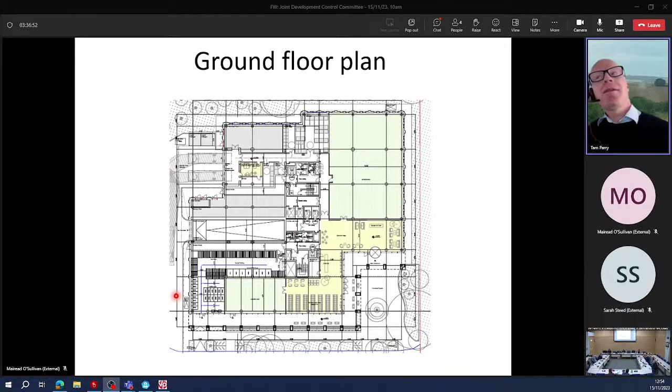In the meantime, the applicant is just providing a drop curb onto Cowley Road, and cyclists will use the short section of Cowley Road between the bridge and the access to the cycle parking. But then when the St John's site comes forward in the future, the cycle path will be built by them, and cyclists will have the benefit of using that cycle path. So it's a joined up strategy, and it should be really, really good for this building in the future.

Thank you very much, Tam.

Can I just pick up, Mairead? Thank you for putting this plan up, because one of the other things I wanted to ask about was the access to the car park.

And the up ramp is the one to the north of that, is it? Or is that two? Do they go down and up on that ramp where your cursor is? Yes, it's a two-way ramp.

And I noticed that the access to the service area, the vehicles will have to go forward and then reverse into that area, and then they'll come out in forward gear, won't they? That's the way it's depicted on the swept path plan. Yes, that's right, that's showing that vehicles can turn and exit the site in forward gear.

Okay, are there any other questions for the case officer? Okay, so members are... oh, sorry, Councillor Smart, yes?

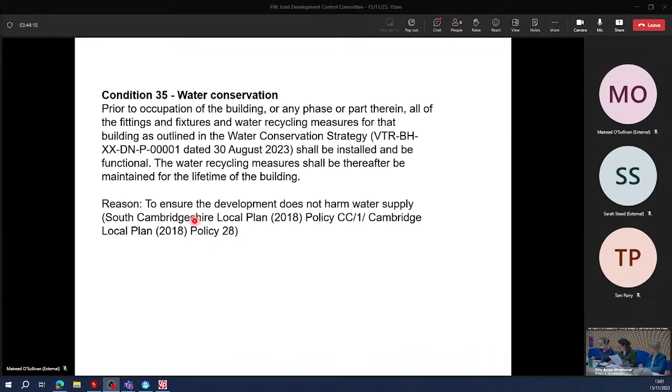So hang on, there was a note that needed to come out, wasn't there? Was that in the amendment sheet? Yes, so that's actually in the amendment sheet, it's not in the text. The amendment sheet incorrectly states condition 20 of just one of the permissions, 2301-487, there is an additional note that needs to be removed. Okay, so that comes in the amendment sheet.

Okay, so members, with all those additional amendments and informatives, let's go to the recommendation for 2301-487/FUL. All those in favour with those amendments, would you like to show? Okay, that's unanimous. No, it's not, is it? Oh sorry, so that's one. Sorry, anybody against the application? Okay, so that's 1, 2, 3, 4, 5, 6, 7, 8, 9, and 1 abstention. Let's vote against, one against. Sorry, that's carried. So that's carried. Thank you.

And then the same recommendation, but applying to 23-01509/FUL. All those in favour, would you raise your hands? That's 9 again, that's 9. And any objections? Any, what's the word, against? Thank you. So that's carried. Thank you very much, members.